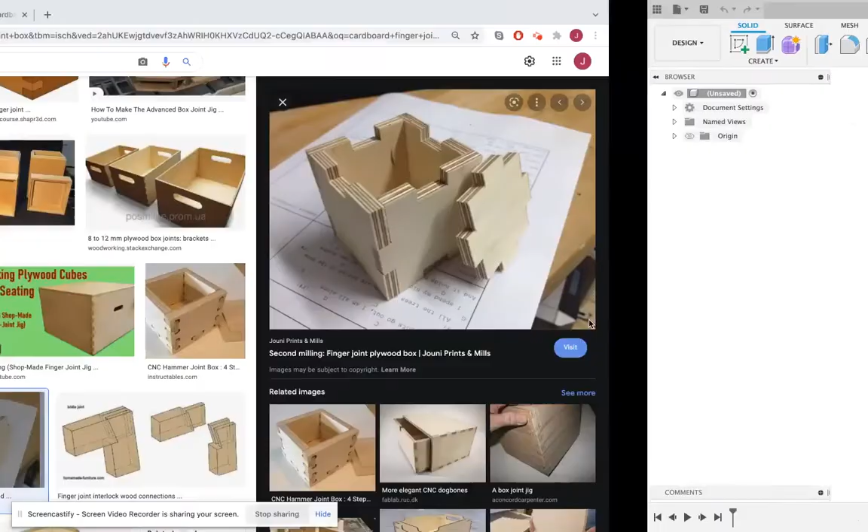There's little fingers on the side, and these are all easily cut by a laser as long as the material's thin enough. So you can scroll through. Ours are kind of looking like that actually. Lots of things you can do with the laser cutter and all these joints.

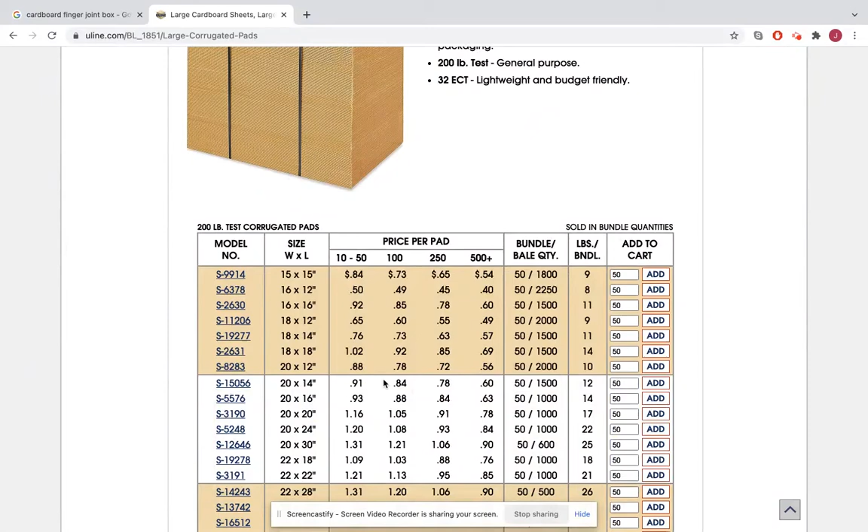And you can buy, incidentally, from Uline, this company that sells a bunch of packaging supplies, corrugated pads pretty cheaply. In fact, that's what we use at the school here. I think one that's exactly our fit, 14 by 20. So easy to get the cardboard.

What we're going to begin with first is sketching. So the first thing I'm going to do is go make a new component, just from habit. I'm going to call it box, because we'll probably end up putting all the sketches for everything on the box onto one sketch rather than making one for the long side, the short side, the top, or the bottom. So I'll end up having sub assemblies in here if I want. Let me turn on the origin in here and make my first sketch. I'm going to draw it on this side, the long side.

Now there's a couple different ways you can actually make a finger joint box in CAD. You can draw rectangles and then pattern those and trim off the sides you don't want. You can draw individual lines and then pattern them or just draw them individually. Or you can do mirroring across some middle axis. So I might try to mix up all of those just to show you guys, and you can choose which way you like the best.

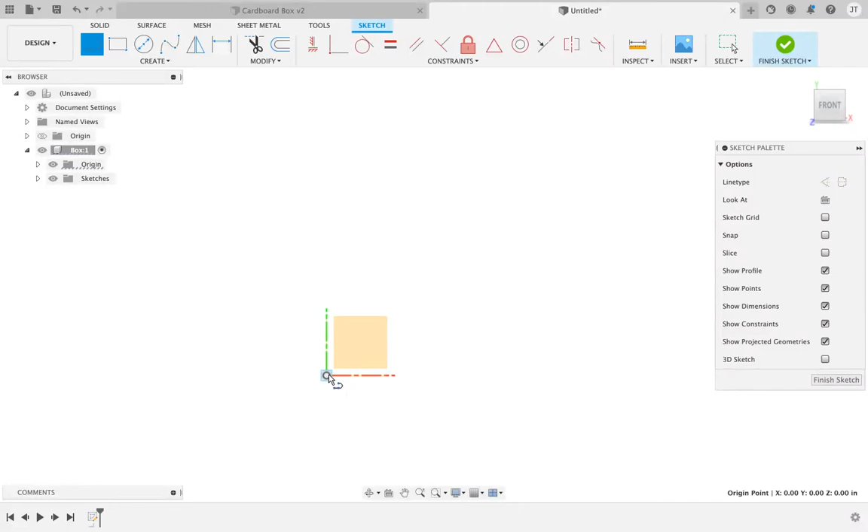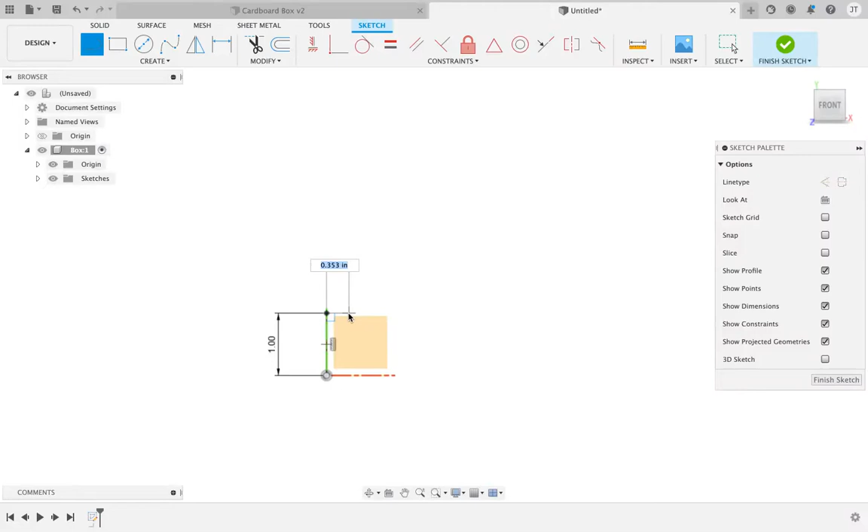So I'll first start with the easiest. We can draw a finger joint box just by drawing a line. L is the shortcut. I'm going to draw it from the center, go up say 1 inch. I think I'm already in that dimension. Yeah, I am. Then I'll go over another line, whatever the thickness is of the material you're going to use. In our case, for this example, we're using cardboard that is 0.175 inches thick. So to make a nice tight fitting, super smooth finger joint, we'll just make that finger the exact thickness of the material, which is 0.175.

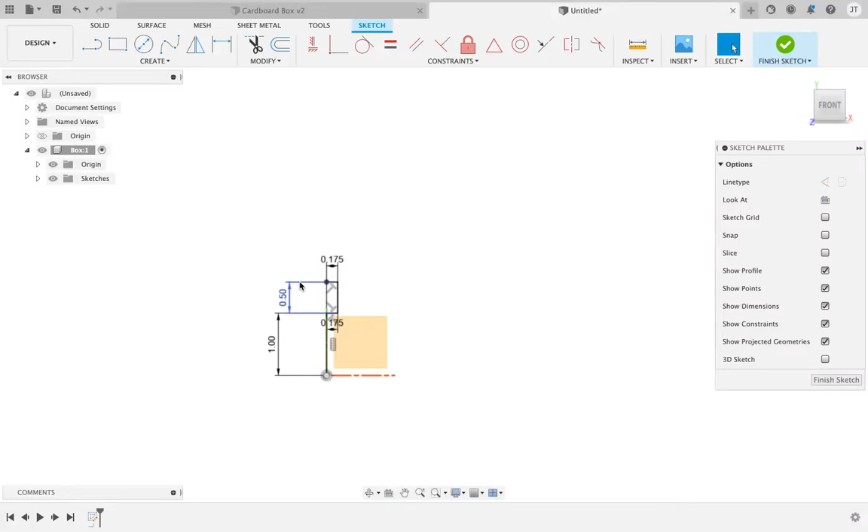Okay, and from here on out, you can just draw some lines whatever way you want to make it. I'll do a repeating 1 inch and a half inch box. I'll come back out, again I'll just do a 0.175, and I'm going to build my way up here. Okay, so I'll end this up with even 1 inch fingers at the top and bottom, and everything else is kind of symmetric in between.

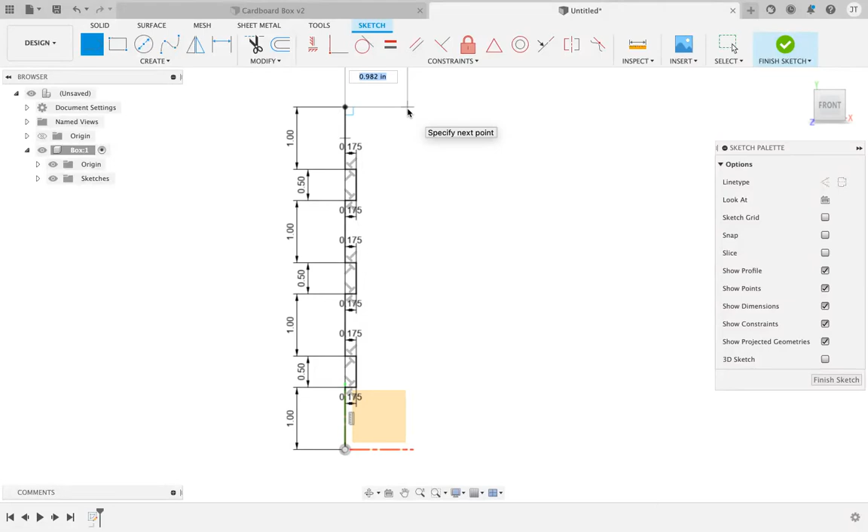So there'll actually be three, these three right here. So that's one way you can do it, and you really could go all the way around there and keep drawing all these lines, however you want, to make a lid for instance. I'll do a little bit, but I'm going to switch ahead to some different techniques to make this faster. I'll draw one more, keep the same pattern going. This will make 0.5, and then I'll draw one more line up, and then we can begin a pattern.

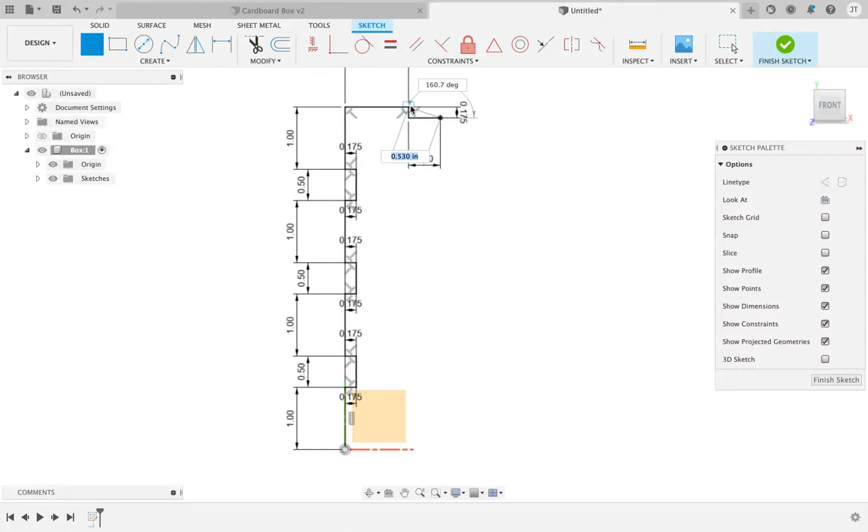Okay, so actually I'm going to turn off my dimensions, they're getting busy in there. I'm going to turn off my constraints too. Now I'm even going to turn off my origin. Because I basically did all these dimensions, everything's black now. It's all fully constrained. Eventually I'm going to lose these constraints because I'm not going to keep everything so defined, like when I do patterns or mirrors, I might end up losing that black locked-in constraint.

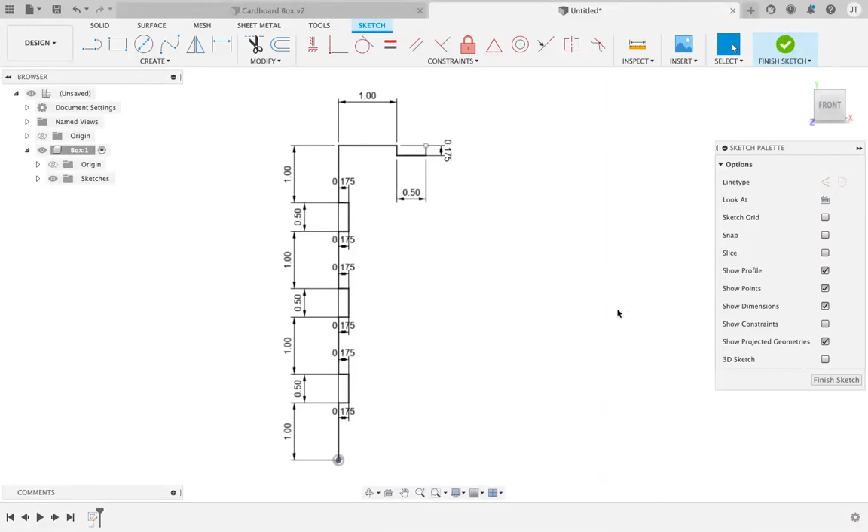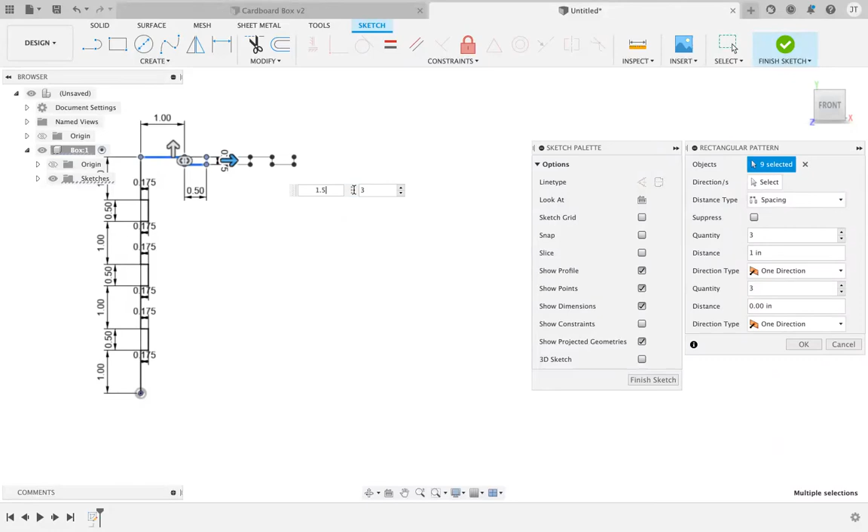So in any case, I want to now start making a pattern. I'm going to go up here, rectangular pattern. I want to pattern this section right here, because when this piece comes over here, it'll connect up with there, and I can make these really quickly. So I'm going to push these over, and let's see here, I'm going to make the spacing 1.5 inches total, so when it spaces out at 1.5 inches, that's when it repeats. You can see they kind of line up now.

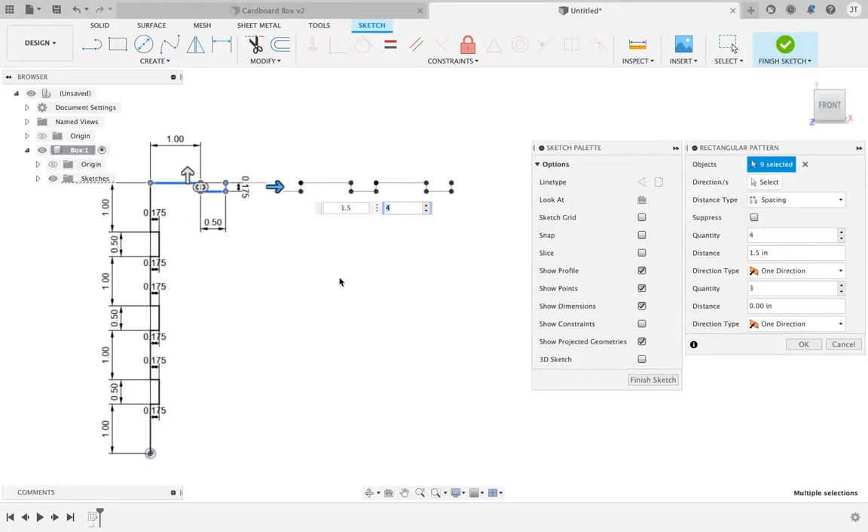I'm going to maybe do, so this is 1.5 here, that's 3, that's 4.5, so this will be 6 inches. Actually, you can do whatever size you want. The height of it, this is going to be also 1.5, 3, 4.5, 5.5 by 6. Oh, and actually this will be the same because I need to finish up this pattern. I'm going to say okay to this pattern. I'm going to draw one more line here to make it symmetric, 1 inch.

Okay, and you can see now that turned blue because I can slide it up and down here. Now, weird that it makes that go too. Oh, because it's a pattern. Okay, so at this point I can mirror this down to the bottom, and I can mirror this side over to here. I just have to first make a mirror.

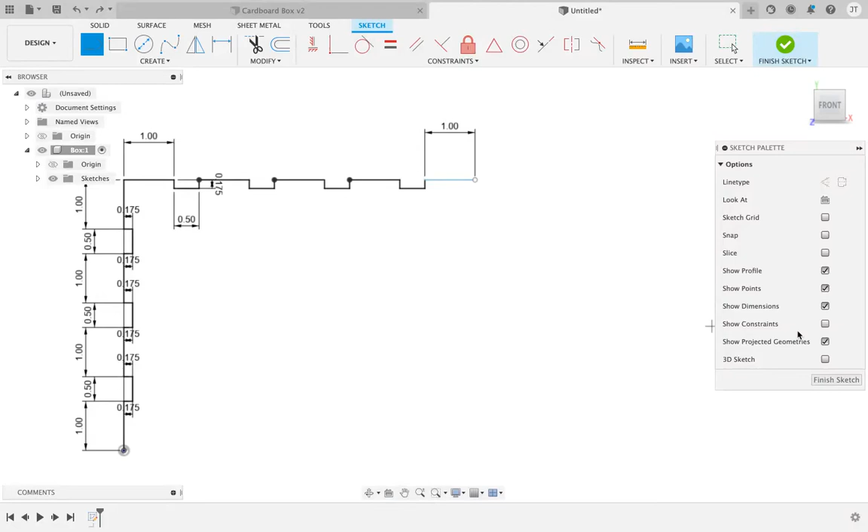So I'm going to again turn off my dimensions. And if I'm looking at this, the very middle must be right here. You can tell because of the triangle. This is the middle just because it's the way it's designed. The triangle always points to the middle of a line, but all these are the middle. So, but I know that this is it. I'm just going to draw a little line there, and that'll be my mirror. And I'll draw one here.

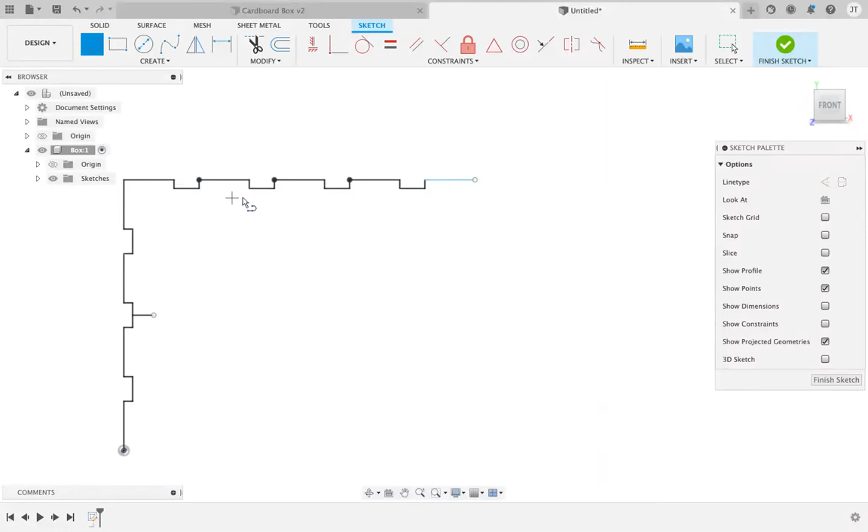Is this symmetric? So actually, this is the middle of here. Okay, so these can be my mirrors.

I'll go up here to create. I'm going to go mirror. Let's first select—oops, first select this stuff. I won't include that mirror line, and my mirror line is this. And there it is. That's nice.

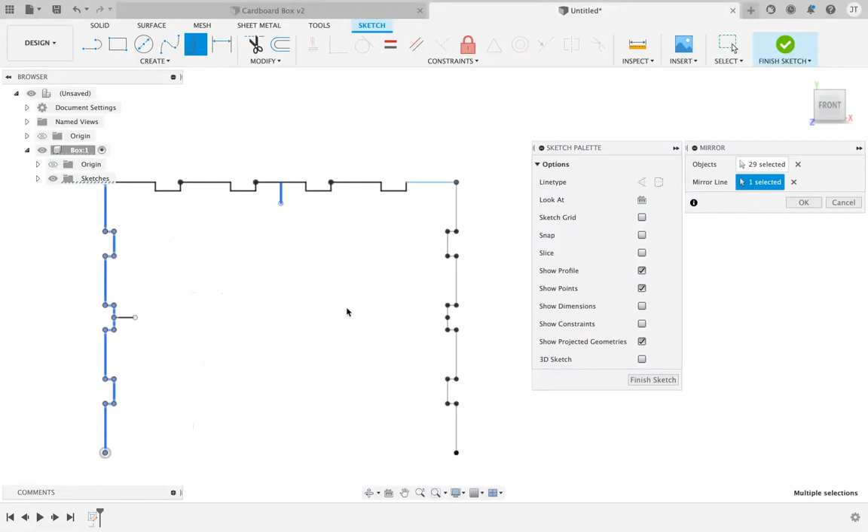I'll right click, repeat that mirror, and I'm going to now select this side. And the actual mirror is right here, and there it ends up. Beautiful. Okay, so that actually can be the side of a box.

So that part's done actually. Now we just kind of have to match up the next connecting side with the next part. So I'm going to make, let me see here. You know what I can do?

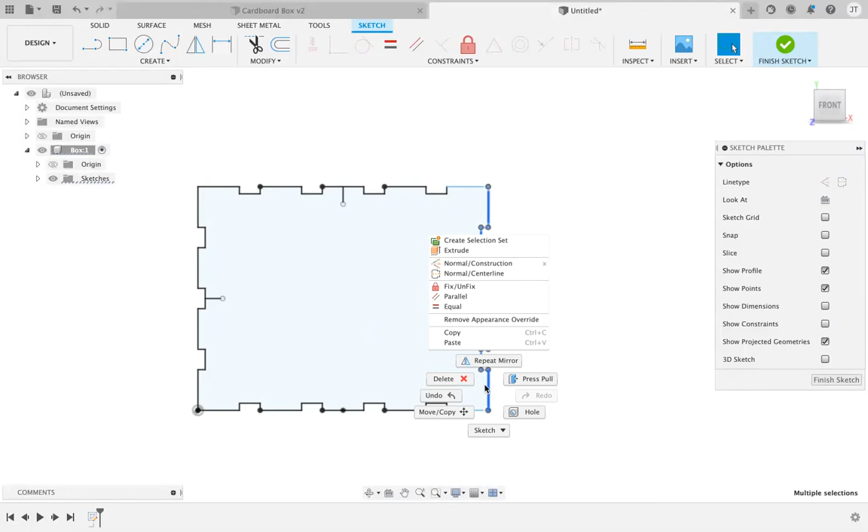I can take this piece right here and I can right click and move copy. I'm going to make a copy of this actually and move it over here. Perfect. That's way easier because now I don't have to redo this. And plus it'll match up perfectly like a little puzzle piece when these connect. So I'll hit OK there.

I lost the constraint because this is all loose, but that's okay. Got to just be careful of this. And this can be mirrored, but first let's figure out the way we want to make the top.

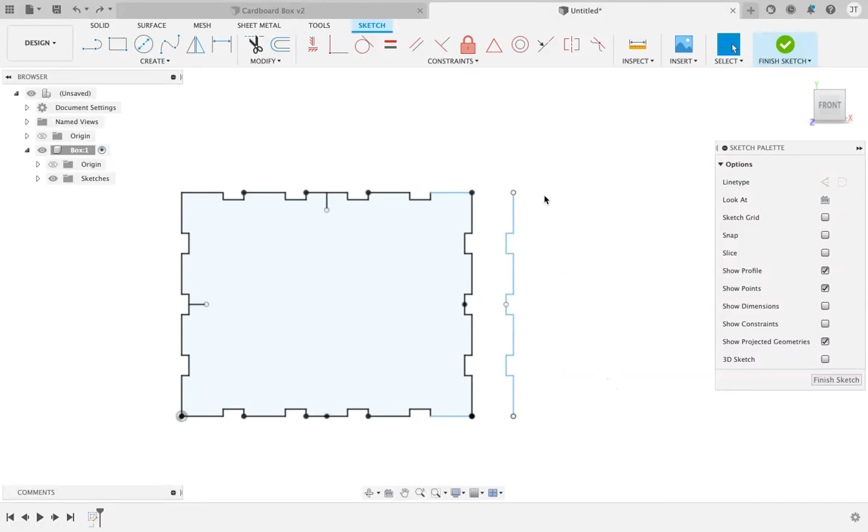So again, we're kind of thinking this box is going to be—we're looking at these two angles. This will be one side of it, the side I just drew, and now I'm going to be sketching this side of it. So you kind of have to imagine in your head that these are going to be perpendicular to each other. This is going to be fitting in here, but at an angle, not straight in like it shows here.

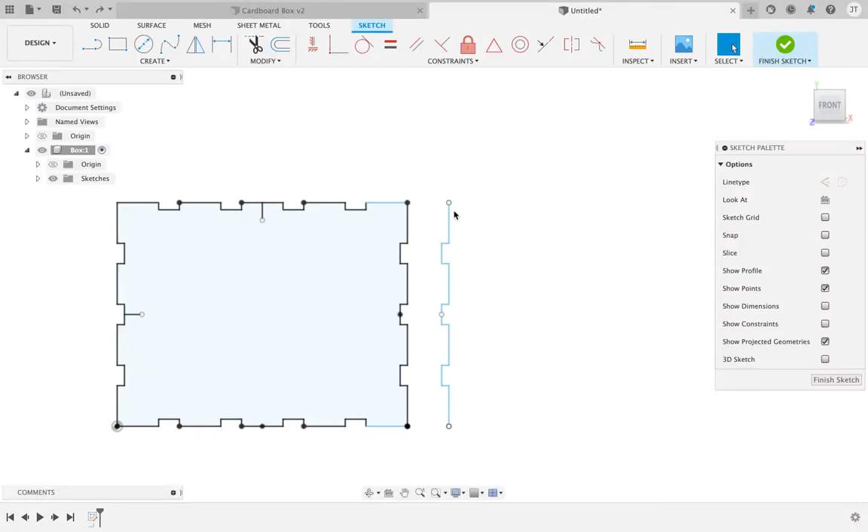Okay, so let's kind of draw this other line coming out. Maybe I'll try some other methods to do this. I'll do some rectangles. The width should be 0.175, or the thickness, and the length of it I can say 1.

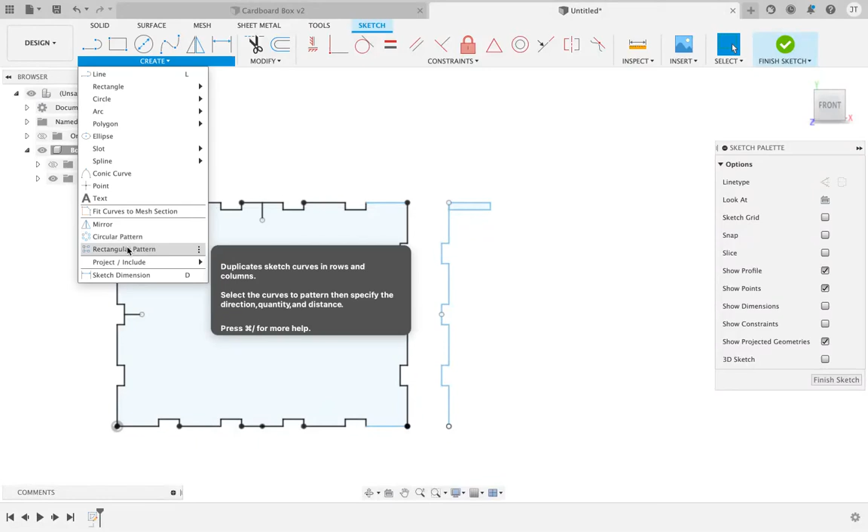And I can keep on—now I can actually go repeat this. Actually, what I should even do—if I repeat this whole thing, I'm going to have overlapping ends because I'm going to have this end and also the beginning of this rectangle. When they repeat, they're going to be now 2 of them.

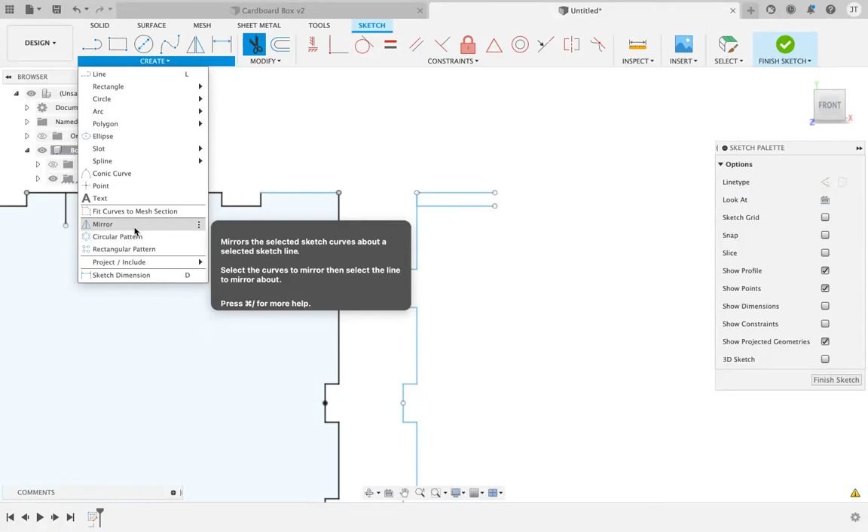I'm going to actually trim this. And then when I repeat, I'm not going to have any overlap, because overlap eventually on this sketch will end up overlapping on the laser. It's going to be cutting through things twice, which is unnecessary.

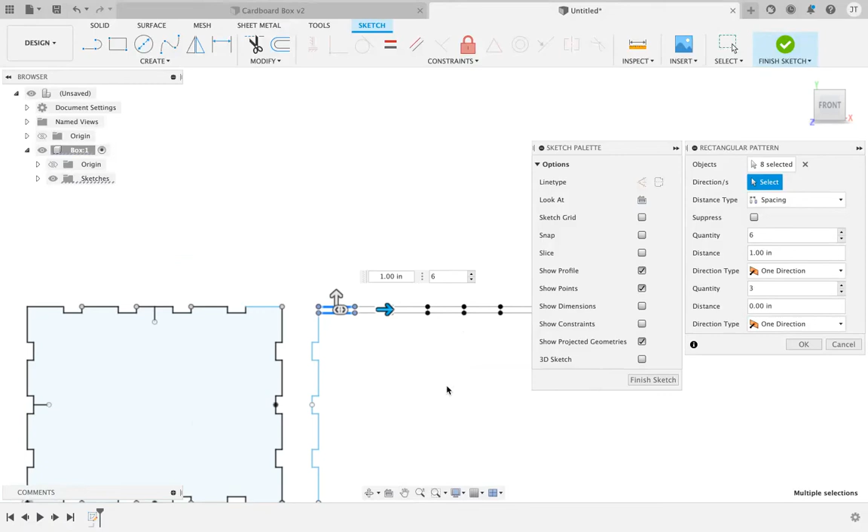So I'll select these 3. Direction will be over here. I can just actually drag that arrow. This is only 1 inch, so I'll make it 1 inch. And I'm just going to make this say 6 of them.

Yeah, sure, that'll give me like an odd one in the middle. I'll hit OK. Okay, so now I have to go fill in this gap here.

And I can now go through and kind of trim off. I'll make this a finger sticking out, so I'll trim this piece. And I'll trim this piece and trim this piece. And then the rest of this will be the box.

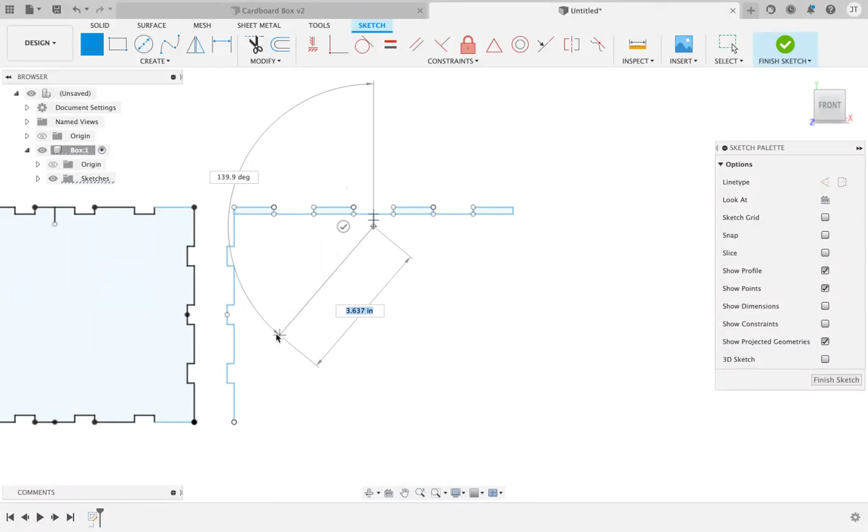I can basically just make mirrors again now that I have the two sides. And honestly, I guess I really should also, before I do that, trim this, trim that, this and that. And then I'll mirror these and they'll end up enclosing themselves.

Let's see, okay, so I'm going to even trim this. Don't need it. Okay, there's my two things. So I'll do the left side first.

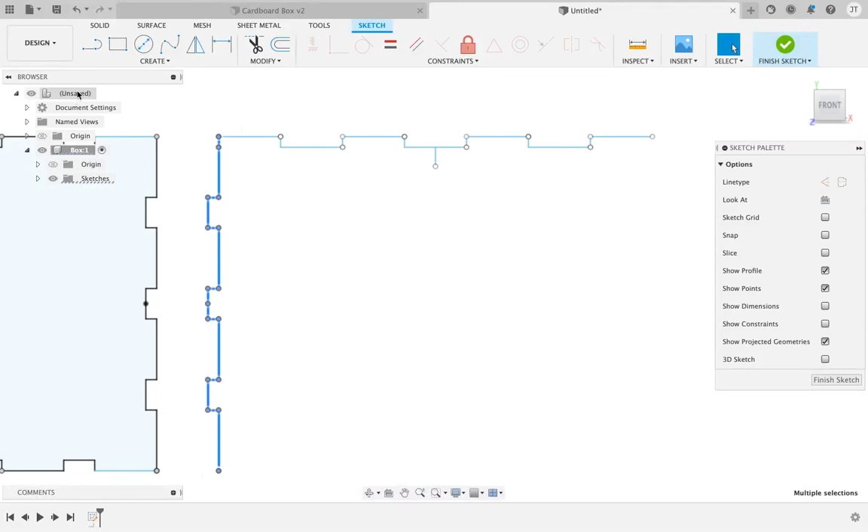Mirror. Here's my mirror. Did that work? Oops, no, I selected it. Deselected, and then I'll select this as my mirror. And there it is. That's good.

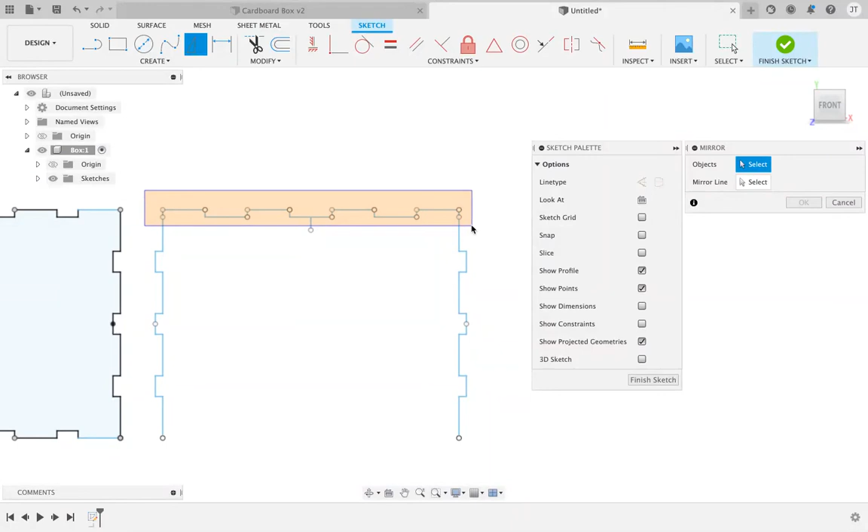And then right click and repeat that. And my mirror line is the old one actually right here. Still works. Okay, good.